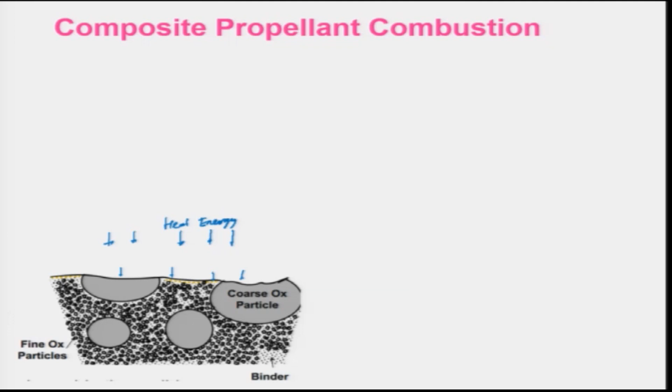If there is some initial ignition energy, let us say some heat being transferred towards this, the heat energy due to ignition, then the oxidizer will be decomposed, and so also the binder, producing products, and then the products will react with each other, and a flame may be formed during this process. Let us look at how the flame looks in composite propellant combustion.

So, this is basically your propellant strand, and this is your flame located here. This is basically the flame surface, and that is supplying heat to the propellant burning surface. This is your propellant burning surface, and the heat will be transferred from this surface to the virgin propellant grain.

Heat transfer takes place due to heat conduction, and this portion you can call a preheat zone. This is being regressed, and as a result there will be a foam layer. This is basically the preheat zone shown here, and bubbles will be formed and some gas will be released, so this region is known as the foam zone, where bubbles are being formed. And of course, the temperature profile will look like this.

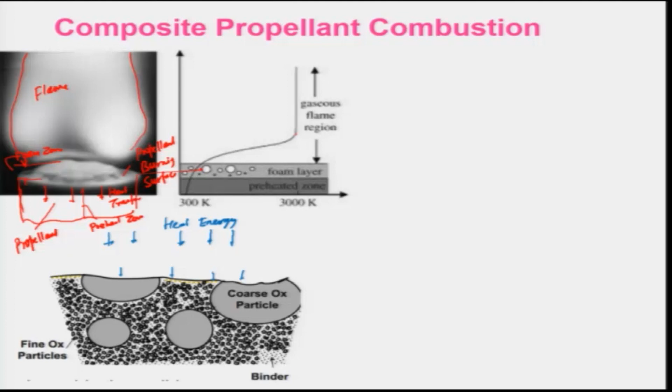There is a little increase here, and then of course, it increases due to the flame, and then it reaches the maximum values. This looks to be quite simple in nature, but keep in mind that there will be binder, and binder means basically the fuel, and AP crystals; there will be an ammonium perchlorate flame, there will be some gases, and then there will be a granular diffusion flame.

But if you look at the various models that have been proposed, in the one we are going to discuss, basically I can take a single crystal here. This is the single AP crystal, and this portion is your binder. So this is your binder and this is your AP crystal, and when it is subjected to heating from the flame or from the ignition source, it will be undergoing decomposition, pyrolysis and gasification.

In the beginning it may be endothermic in nature, but later on when there is adsorption of some of the species, it may be a little bit exothermic in nature when the flame is established. Then when it decomposes, it will form a flame which is known as the ammonium perchlorate flame, and the fuel will also be decomposing. So, this is known as fuel products

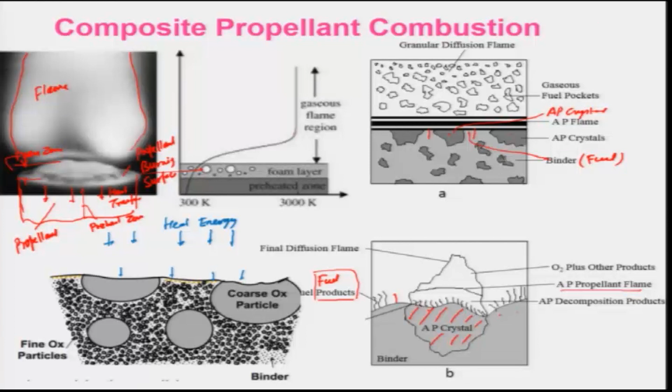This model was basically given by Beckstead, Derr and Price to estimate the burning rate and also to look at how the combustion process can be incorporated in the model for the burning rates, the structure of the flames, temperature profile predictions and other things. Of course, there are several models available, but this looks to be capturing the physics of the problem. Therefore, we are considering what is known in literature as the BDP model for composite propellant combustion.

So, as I told, the ammonium perchlorate crystalline particles are flanked by the binder. We are taking a very small portion of that, and when heat is transferred to the surface due to the initial ignition energy or some other energy source, both the binder and the oxidizer get decomposed. As a result, they will be converted into various products. For example, when the fuel gets decomposed, thermally degraded, unburnt hydrocarbons and some radicals will be formed.

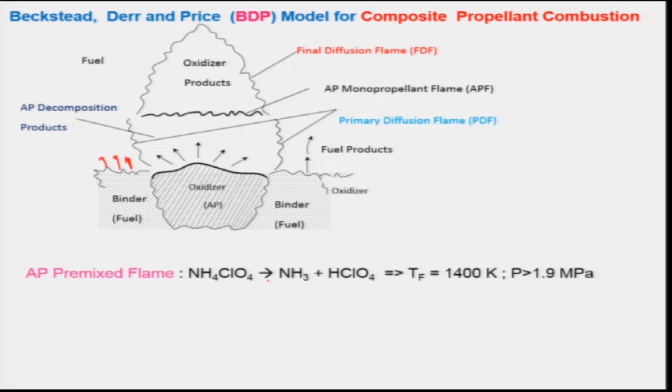And when the oxidizer is decomposed, the ammonium perchlorate will be converted to ammonia (NH3) and HClO4, provided the chamber pressure is greater than 1.9 megapascals. If it is lower, it may not really decompose. It gives rise to a certain amount of heat, and they react with each other because the fuel and oxidizer are mixed together. Therefore, it forms the ammonium perchlorate flame, or monopropellant flame, because fuel and oxidizer are already together, decomposed from the ammonium perchlorate crystal. It gives a temperature of around 1300 to 1400 Kelvin.

This is your flame. Besides this, the decomposed products of the ammonium perchlorate will also be diffusing without really reacting, and mix with the decomposition products of the fuel, and then a flame is formed at the interface of the ammonium perchlorate crystal and binder, known as the primary diffusion flame. Keep in mind that in premixed it is already mixed together, but in this case the fuel and the oxidizer emanating from the decomposition of ammonium perchlorate mix at the interface of the diffusion flame.

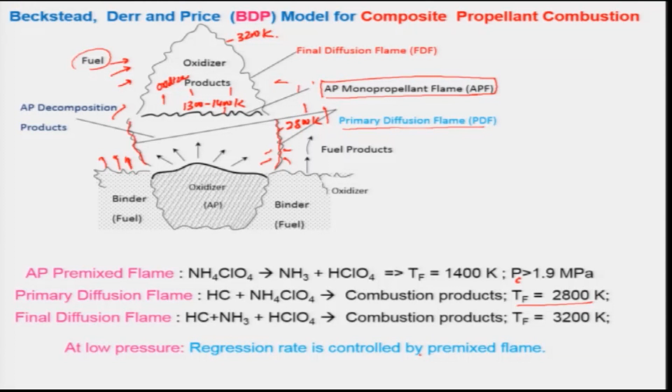But at high pressure the residence time required for the combustion to occur will be controlled by the diffusion process, because at high pressure the chemical reaction will be occurring very fast. So, therefore, at high pressure the regression rate is controlled by the diffusion flame.

Keep in mind that although we have shown the flame in an exaggerated manner, taking a very large spatial domain, the thickness of the flame will be of the order of a few mm, and the thickness of the flame will be decreasing when the pressure of the chamber increases. It is quite complex in nature, and therefore it is not really possible to discuss in this class.

However, it is very essential to know the regression rate, and if some of you are interested, you can look at this paper to find out how the regression rate can be obtained by using an analytical model. But keep in mind that the burning rate is an important parameter which must be known for designing a rocket engine, and also for learning how it will be operated and its performance. So, therefore, we need to really know the burning rate of the propellant.

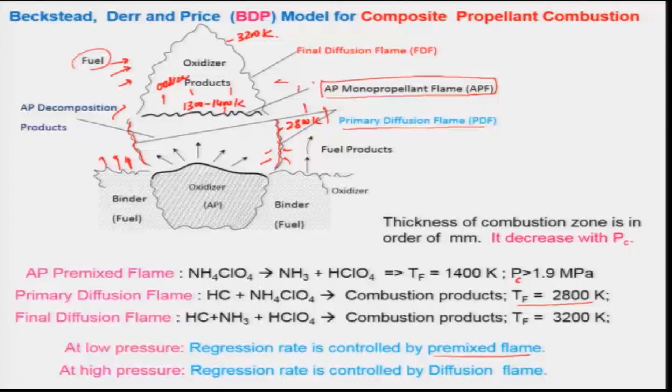So, the question arises, how can we measure the regression rate of propellant? Of course, one can predict the burning rate or the regression rate of propellant, but measurement is very important. So, what are the ways by which we can measure the burning rate of propellant? Of course, it is very easy if you take any solid fuel and look at how the regressing surface or the burning surface is receding with respect to time.

But in case of a solid propellant rocket engine, the propellant has to be burnt at high pressure. We know why we are using high pressure in the rocket engine. Therefore, it is obvious that the burning rate must also be changing with respect to the chamber pressure, and also the propellant temperature. Now, the question arises, how will we determine the regression rate of the propellant experimentally?

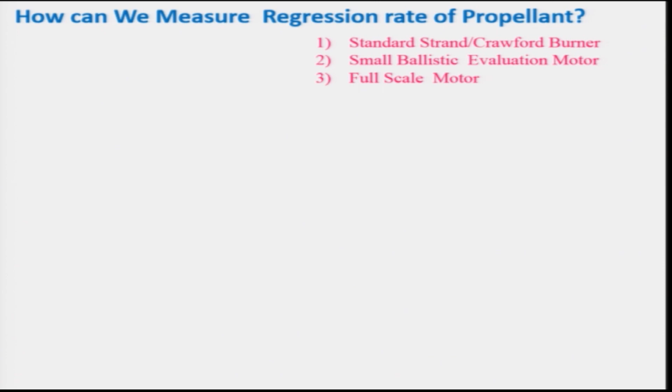So, there are three methods being used routinely. One is the standard strand or Crawford burner, the other is the small ballistic evaluation motor, and the other one is the full scale rocket motor. Keep in mind that the third case will give you the actual situation and can simulate the actual condition, such that whatever regression rate you get will be the right one. But it is a very costly affair, quite complex in nature, and also quite risky.

Therefore, people have devised small evaluation rocket engines, but scaling is a big problem in that. However, they will be more realistic as compared to the strand or the Crawford burner. But the Crawford burner or strand burner is used very much whenever one is developing the propellant for a certain application, so that you will be changing your composition and looking at how these changes affect the regression rate at different pressures.

So, let us now look at a schematic of a strand burner, shown here. This is your propellant strand in the burner, and this is generally a cylindrical grain manufactured with a certain diameter and certain length, and it has to have a liner or inhibitor, so that it will not react with the propellant or get affected by the propellant, and it will be bonded properly.

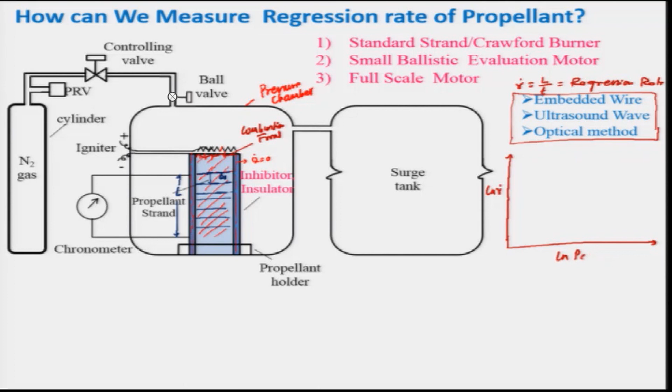And that is the older method which is being used, but in recent time there are several other methods which have been devised. These are the methods of measurement, like the ultrasound wave, which is used to find out how much length of the propellant is regressed with respect to time, and also the optical method. And when you do that, you will get the data of the regression rate with respect to chamber pressure. I can plot ln r dot with ln p c, so you can get some data over here.

So, you can plot this and you will get a relationship, that is r dot is equal to a p c to the power n. The slope will be n, and the intercept will be ln a. From this I can get ln a, and I can get a relationship. This is a semi-empirical relationship, and interestingly you will find that this relationship can be valid for both double base propellant and also composite propellant.

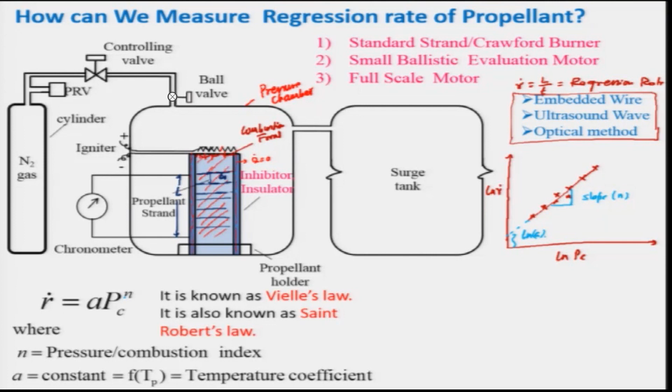And keep in mind that n is known as the pressure or combustion index, and a is not a non-dimensional number, it has certain dimensions, and this is known as the temperature coefficient, and n will indicate the extent to which the chamber pressure can affect the regression rate. And keep in mind that a is not a constant, it will be dependent on temperature, and this relationship is known as the Vielle's law, or also St. Robert's law in literature. It is not a law, but people are using it. This is basically an empirical relationship which is valid for certain kinds of propellants.

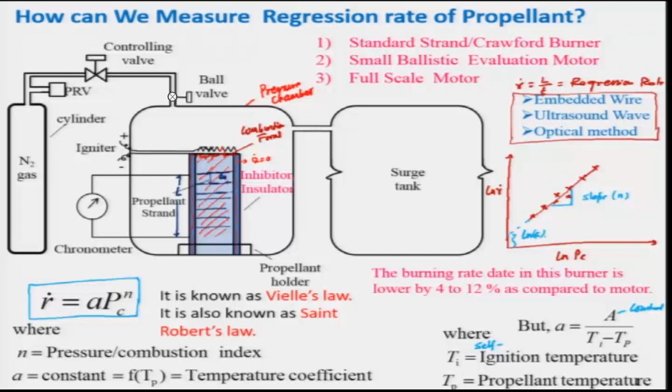And as I was telling, a is not really constant, a is basically a constant divided by T I minus T p. T I is your ignition temperature, or self ignition temperature of the propellant, and T p is the propellant temperature, which is similar to the ambient temperature of the region where it is being operated. Keep in mind that the burning rate data in this burner will generally be lower by 4 to 12% as compared to the actual full scale motor, but this can be utilized as it is much easier to conduct the experiment and get the data.

So, with this we will stop, and we will be discussing this Vielle's law or St. Robert law for the regression rate in the next lecture. Thank you very much.